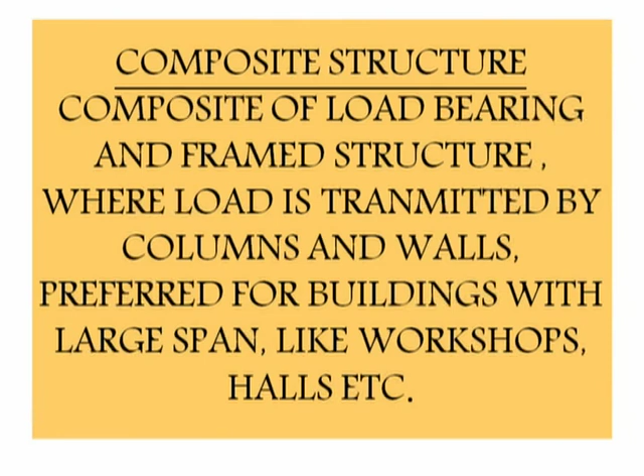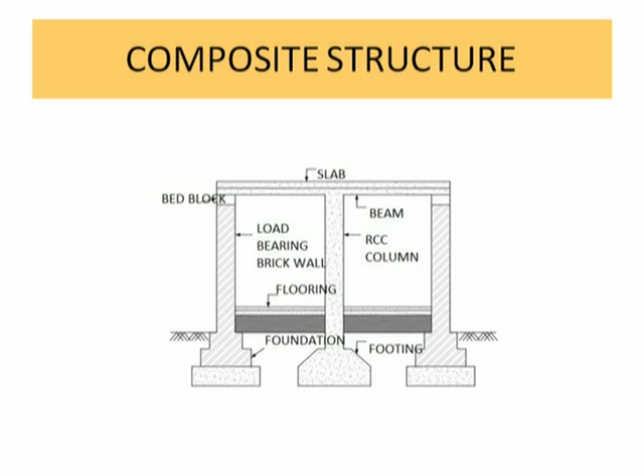This picture you are seeing is an example of a composite structure. Here you can see the different components like the slab and the beam, an RCC column, as well as a load-bearing brick wall. The flooring is also mentioned here, and at the bottom you can see the foundation. The load of this structure is transmitted to the foundation by the walls as well as the column. So the vertical elements present in the structure, that is the wall and the column, are responsible for the transmission of the load.

Now we will discuss the comparison between the load-bearing and the frame structure. Earlier we saw two categories of the type of structure: one is load-bearing and the other is the frame structure. Let us see the difference between these two. In the load-bearing structure, the components are slabs, beams, and walls. In the frame structure, the components are slabs, beams, and columns. In load-bearing there is a wall; in the frame structure there is a column. The load is transmitted through the walls in the load-bearing structure, while in the frame structure the load is transmitted through the columns. That is the basic difference.

Since the wall is responsible for the transmission of the load, load-bearing structures are limited up to three stories. The normal practice is that load-bearing structures are constructed up to three stories. In the case of the frame structure, you can construct a multi-storied building. So multi-storied buildings are constructed using the frame structure method of construction.

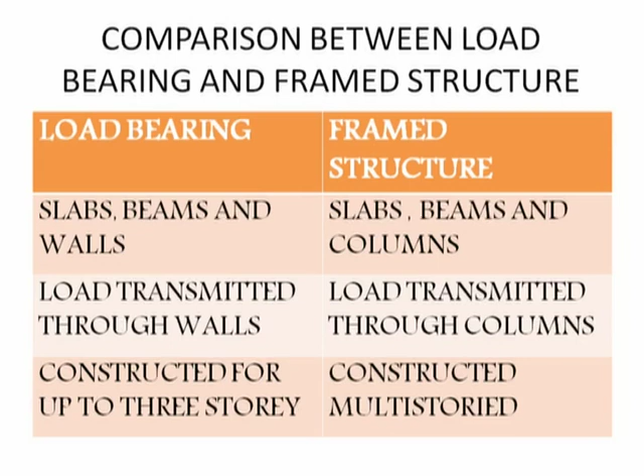In the load-bearing structure, the thickness of the walls reduces from the ground floor to the higher floors. The highest thickness will be in the ground floor walls. As you go to the upper floors, the thickness of the wall is reduced. In the case of the frame structure, the thickness remains the same.

Walls are mere partition walls. In the frame structure, walls are there, but the function of these walls is not to take the load, but just to create a partition among the different rooms. So in the case of the frame structure, the wall thickness remains the same. It is not changing. It is the same for all floors, and the walls have a purpose only for partition.

As you know, the thickness of the wall is reduced from the bottom to the top, so the carpet area of the lower floor will be less. The carpet area of the lower floor will be less, and if you go upstairs, the carpet area will be a bit higher in the higher floors. In the case of the frame structure, the carpet area remains the same.

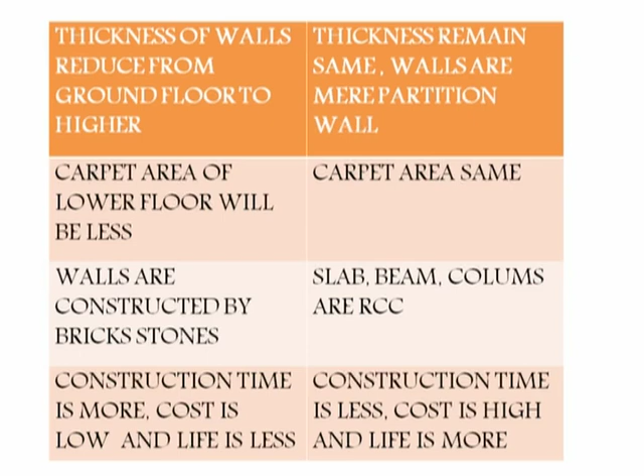In the case of the load-bearing structure, the construction time is more, the cost is low and the life is less. In the case of the frame structure, the construction time is less, the cost is high and the life is more. Life is more in the frame structure compared to the load-bearing structure.

So this is the discussion we have carried out relating to buildings classified according to the type of construction, and the difference we have made between the load-bearing structure and the frame structure. Now come to the next topic.

The next point of discussion is the types of loads acting on buildings. Buildings are susceptible to loads of different types. Let us see the different types of loads acting on buildings. The first load is known as the dead load. The second type is the live load. Next is the wind load. Then the snow load. Then the load due to rain. And last is the earthquake load.

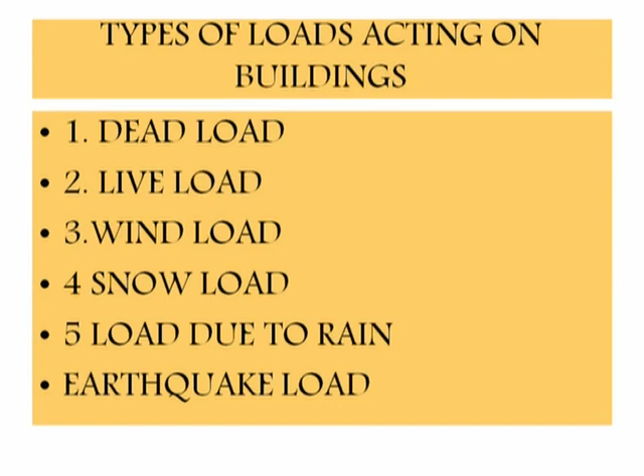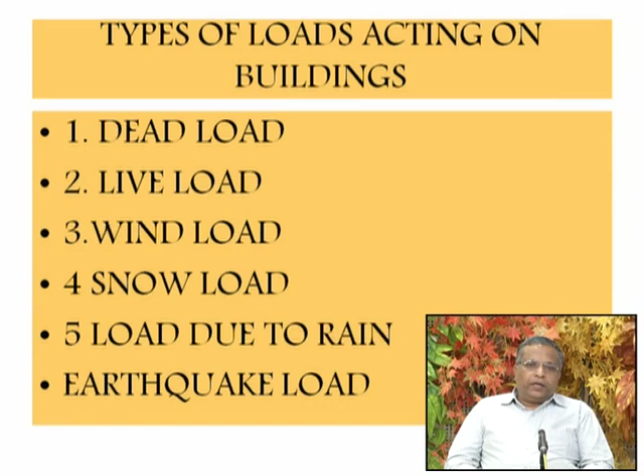These are the different loads or forces acting on a building. The building is to be designed in such a way that it resists these different loads. Let us see how these loads act on the building differently. First is the dead load. What is a dead load?

Say, for example, a building is constructed. A building has its own weight. If nobody is in the building and it is empty, the building still has its own weight, the weight of its own components: the load of the RCC slab, the load of the walls, the load of the doors and windows. So this type of load is known as a dead load.

This dead load is a permanent, immovable, untransferable load. It is a load of the building components; in other words, it is the load of the building itself. So this load is the load of the different materials of which the building is constructed. Normally the dead load is the load of the different materials.

To work out the load acting on the building, you must know the quantum of material in the building, and this will be based on the dimensions of the different components of the building constructed with the different materials. Those dimensions you must know. Then you must know the volume of that particular material, and on that basis you can work out the load acting on the building.

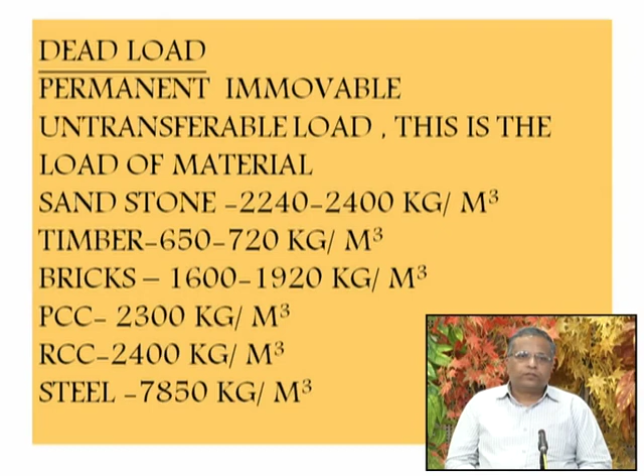The bricks have a weight of 1600 to 1920 kilograms per meter cube. Then is the PCC, that is the plain cement concrete, that is 2300 kilograms per meter cube. Then is the RCC, that is 2400 kilograms per meter cube. Then is the steel, that is 7850 kilograms per meter cube. So depending on the type of the material, different unit weights will be there.

Steel is the most common type of material, and it has a weight of 7850 kilograms per meter cube. RCC is also a very important material, and it has a weight of 2400 kilograms per meter cube. Some other materials: cement is 1440 kilograms per meter cube. Sand is 1760 to 2000 kilograms per meter cube.

Water has a unit weight of 1000 kilograms per meter cube. It will be useful for designing the water tank. Clay will have a weight of 1760 kilograms per meter cube. Limestone has a weight of 2400 to 2640 kilograms per meter cube. These are the different unit weights of the different materials, on the basis of which you can work out the dead load of the building.

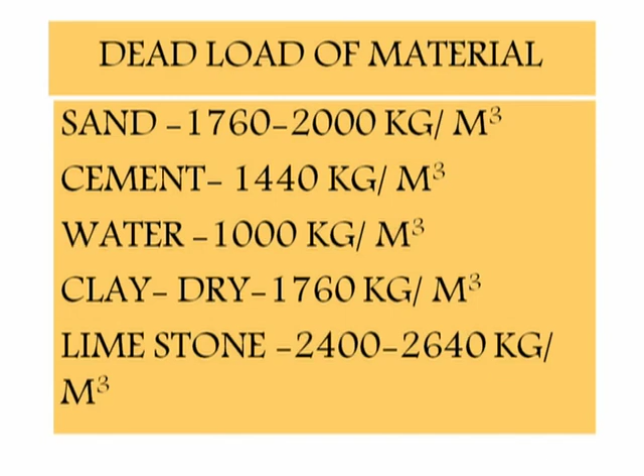Then the second category of load is the live load. Whatever moving or transferable load is acting on the building, say for example the number of persons visiting a building. You may bring some material, some movable furniture, some other house appliances. These are all movable, transferable and temporary. Persons gathered in a house may disperse. So this load is known as a live load. This is a movable, transferable, temporary load.

It is also known as superimposed load. This load acts on a building on a temporary basis. It may be more, it may be less, depending on whatever things you gather in a building temporarily. This load is to be calculated according to the normal criteria in the Indian standard. For example, in the design of a building, the following types of live loads are to be taken. First is the dwelling house, considered as 200 kilograms per meter square.

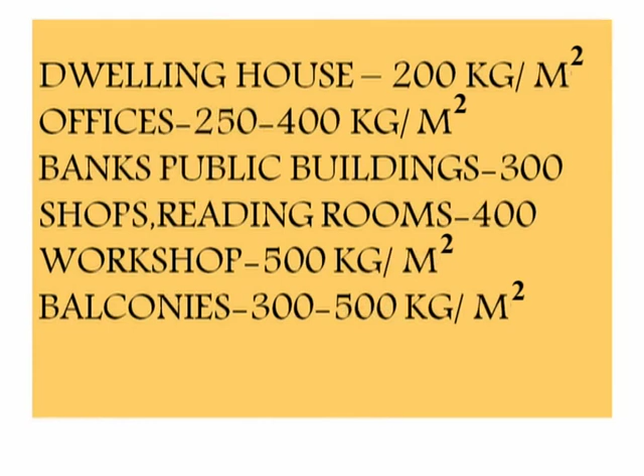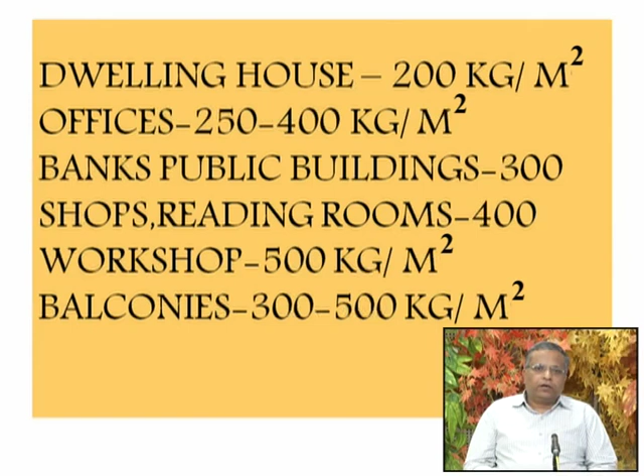Then offices, 250 to 400 kg per meter square. Banks or public buildings, 300 kilograms per meter square. Shops and reading rooms, 400 kg per meter square. Workshops, 500 kg per meter square. Balconies, 300 to 500 kg per meter square. Floors of warehouses of medium height, 750 kg per meter square. And floors of warehouses, factories and heavyweight, 1000 kg per meter square. These are the criteria to be provided for the live load.

Now in the case of a multi-storied structure, when the number of floors is more, say 10 floors or 7 floors, we know that all the floors will not carry the superimposed load at a time, because in normal practice the load does not act on all the floors simultaneously. For that purpose, a percentage reduction in the load is suggested, because in practice all the floors will not be loaded at a time, so for the sake of economy the loads are reduced.

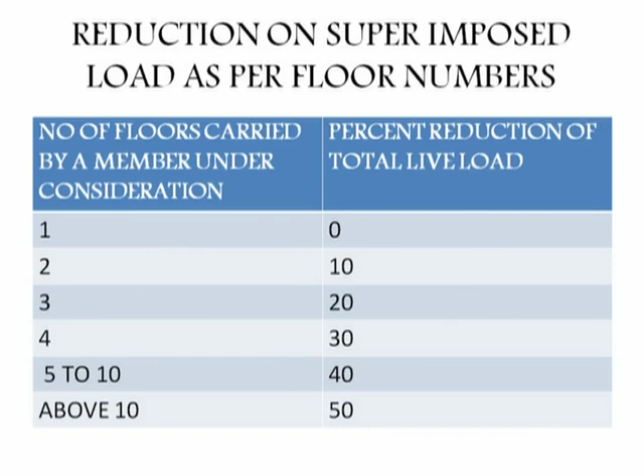Depending on the number of floors, the percentage reduction is suggested by the Indian standard. For one floor, there is 0% reduction, meaning no reduction. For two floors, a reduction of 10%. For three floors, a reduction of 20%. For 4 floors, a reduction of 30%. For 5 to 10 floors, a reduction of 40%. And above 10 floors, a reduction of 50%. So depending on the number of floors, the percentage reduction is made.

The next category of the load is the wind load. The wind load normally acts on a multi-story building. The windward face of the building will have the force of the wind acting on it. If the height is more, the wind load will be a significant one, and therefore it is required to be considered in the design of a building. In the case of tall buildings, the effect of the wind load is considered.

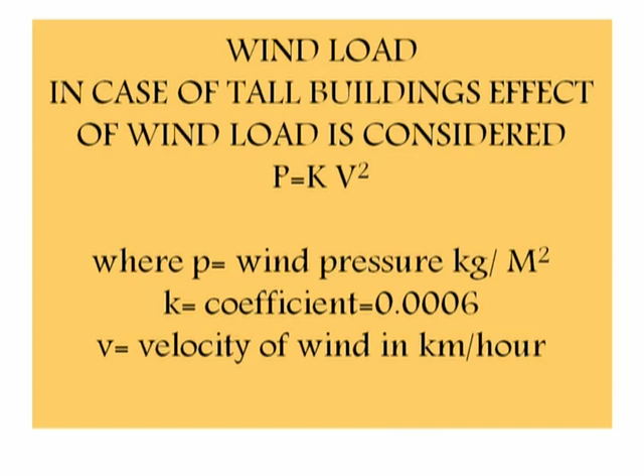The formula for finding the forces acting on the building due to wind load is mentioned here. It is P = K × V², where P is the wind pressure, measured in kilograms per meter square. K is the coefficient, which is normally taken with the value 0.0006. And V is the velocity of the wind in kilometers per hour. This way the wind load is considered on a structure.

In mountainous and northern India, there is another type of load which is also considered, known as the snow load. Snow will have an effect of load. When there is snowfall, the buildings are susceptible to the snow load, and it is considered as 2.5 kilograms per meter square of the area.

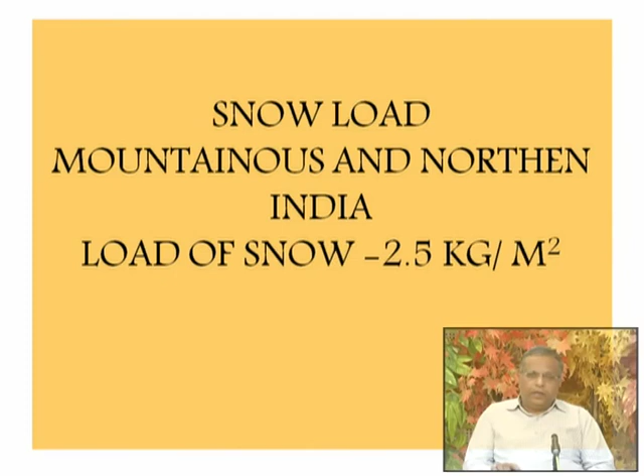The next load is very important in the design and construction of the building: earthquake loads. Earthquake is a very prominent phenomenon, and the building should be designed as an earthquake resistant building. Many measures are required to be taken so that the building is earthquake resistant. Proper reinforcement, proper consideration of the forces, and proper design of the foundation are very essential so that the building will be earthquake resistant.

Depending on the height and the width, the building is to be planned in such a way that it has the features of an earthquake resistant building. You may provide reinforcement in the corners of the walls and many other measures. You should not design a slender building. That is a necessity in the design of an earthquake resistant building.

Due to earthquakes, horizontal and vertical vibrations are created, and therefore the necessary earthquake factors are considered. To take these vibrations into consideration, it is necessary that the earthquake factors are considered. India is divided into 5 earthquake zones to consider the forces according to the risk of earthquake.

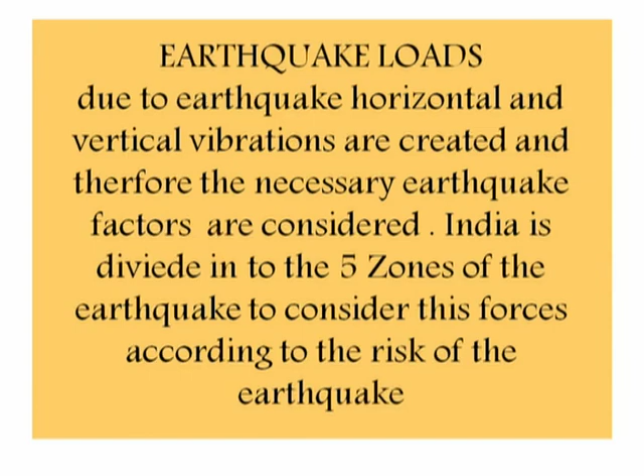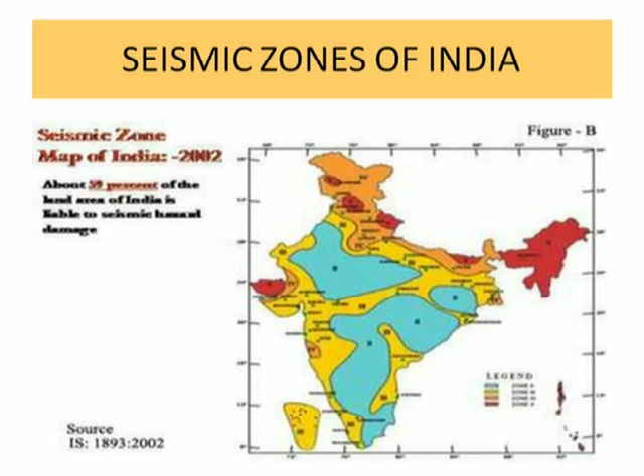According to the different accelerations of the earthquake waves, the necessary factors are considered for the design of a building. For different types of construction, it is very essential to consider the earthquake forces, and the structure should be designed in such a way that it is earthquake resistant. These are the different loads that we have discussed so far.

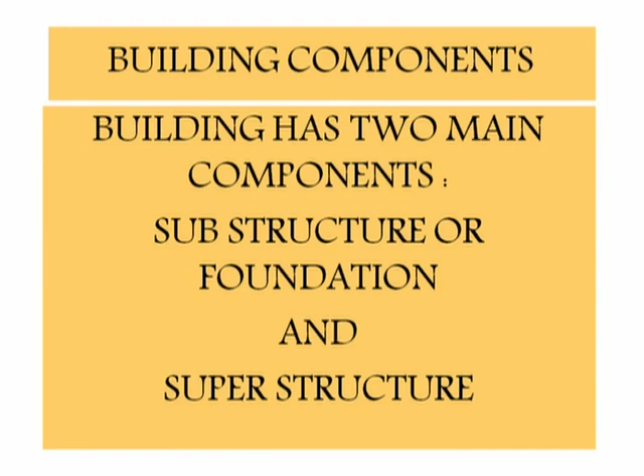After discussing the different types of loads acting on the building, we will now start our discussion on the building components. First of all, a building has 2 main components, or you can say 2 main parts. The first one is the substructure or the foundation, and the second part is the superstructure.

Let us see what a substructure or foundation is. The substructure or foundation is the lower portion of the building, usually constructed below the ground level.

So the building is divided into two parts: one is below the ground, one is above the ground. Substructure is the lowermost portion of the building. It is usually constructed below the ground level. The substructure is a part of the building below ground level.

Now, this part of the building below the ground level transmits the load of the superstructure below the ground level. The function of this part is the transmission of the load of the superstructure to the ground. That component, that part, is known as the substructure or the foundation.

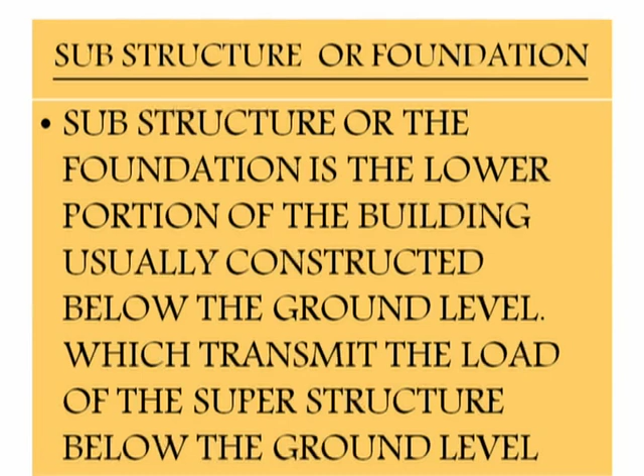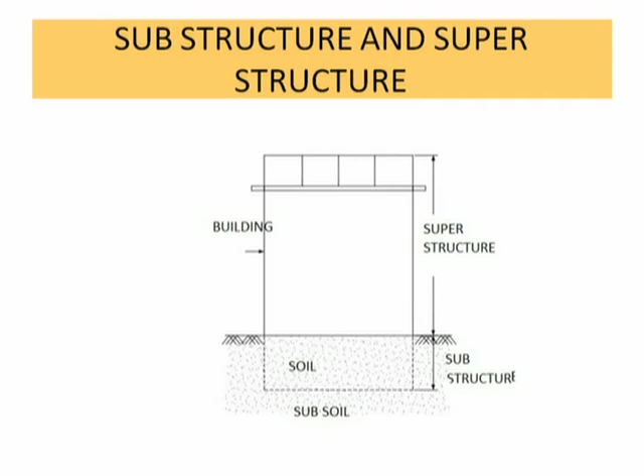Here is a picture which shows the clear distinction between the substructure and the superstructure. Here you see the part which is below the ground is known as the substructure, and the part which is above the ground is the superstructure.

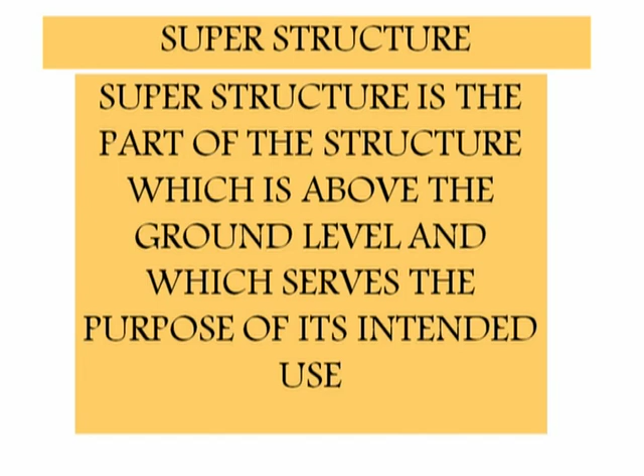Superstructure is the part of the structure which is above the ground level and which serves the purpose of its intended use. Now, the part of the structure which is above the ground is known as the superstructure. It may be a room, it may be a kitchen, or whatever the purpose for which it is intended. That part is serving that purpose, and that is known as the superstructure. All the parts of the building that we see above the ground level are known as superstructure.

Now, the superstructure has many different components. Here we have divided the building into two major parts. One is the substructure, another is the superstructure. Substructure is the foundation, and all the other components are part of the superstructure.

Superstructure's parts are: the plinth, the walls, columns and beams, the ground floor and the upper floors, the sills, the lintels and weather sheds, the doors, windows and ventilators, the roofs and slabs, the parapet, the stairs, lifts, ramps, and the building finishes, which include the plaster and the whitewashing. So all these parts are known as superstructure.

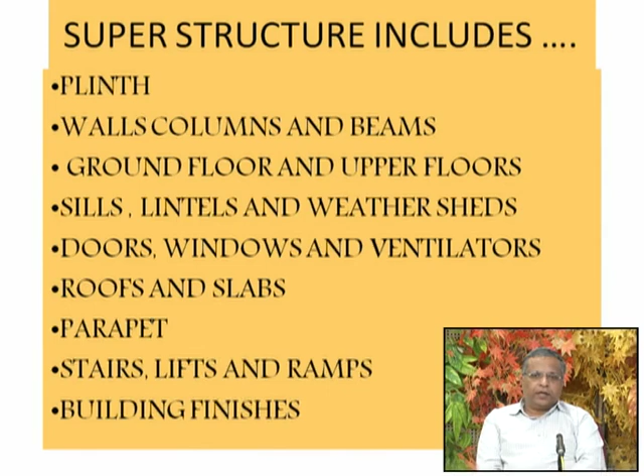Let us repeat this once again. Plinth means the part of the building below the floor and above the ground. Walls, columns, beams, floors, lintels, sills, weather sheds, doors, windows, ventilators, roofs, slabs, parapet, stairs, lifts and ramps, building finishes. These all are the superstructure.

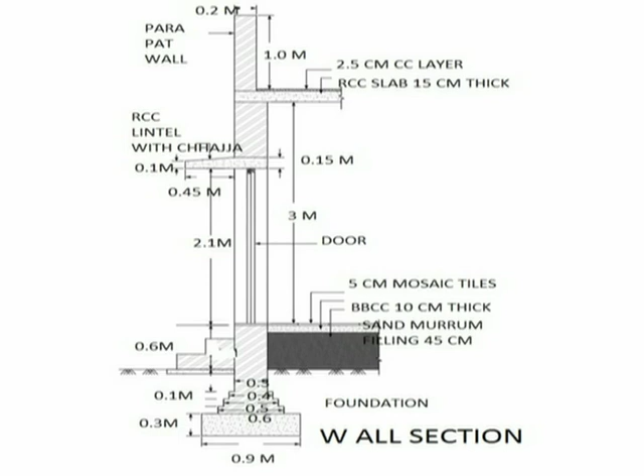These are the different components. Here the substructure is mentioned, the superstructure is mentioned. All these different components are mentioned in this section. The study of this section of the wall is very important because there you will be able to understand all the normal dimensions of the building.

Now let us see the foundation. Now let us see the different components of the building. Out of all the components of the building, foundations are very important because foundation is a structure which transmits the load from superstructure to subsoil. The basic function of foundation is to transmit the dead loads, live loads, and other loads to the subsoil on which it rests.

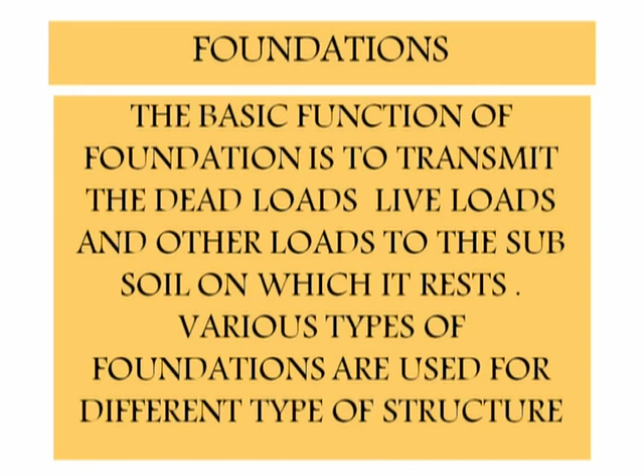Various types of foundations are used for different types of structures. Now you see, the basic function of the foundation is to transmit the dead loads, live loads, and other loads to the subsoil on which it is resting. Various types of foundations are used for different types of structures. Let us see those various foundations.

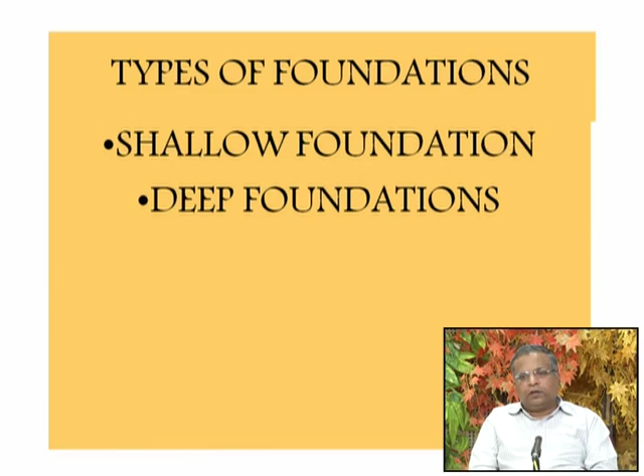Foundations are broadly divided into two categories. One category is the shallow foundation and another is deep foundations. Depending on the depth of the foundation, the foundations are categorized as it may be a shallow foundation or it may be a deep foundation. First of all, let us see what is a shallow foundation. Shallow foundations, depending on the depth.

If the depth of the foundation is equal to or less than its width, it is called shallow foundation. Say for example, if the depth of the foundation is less than its width, then it is known as shallow foundation. Shallow foundation should be taken to a minimum depth of 800 millimeter. So when the depth is less than its width, then it is known as a shallow foundation. The normal depth of the foundation is near 800 millimeter. It may be extended up to 1000 millimeter also. So normally up to 1 meter you can have the shallow foundation.

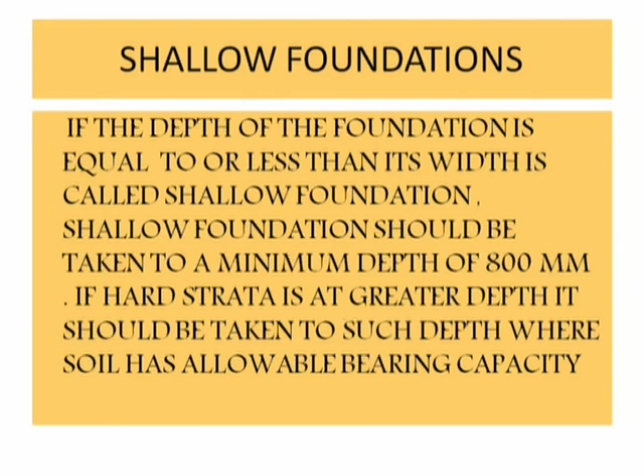Now, where to provide the shallow foundation? In which situation is it preferable to provide a shallow foundation? If the hard strata is at a greater depth, it should be taken to such depth where soil has allowable bearing capacity. Now, in case you don't find the hard strata in the range of 800 to 1000 millimeter, you should go deep because the hard strata is required and the safe bearing capacity is also required for the safety of the foundation. Therefore, this depth may be extended wherever required, and where there is no availability of hard strata within that much depth, you have to go for more depth. Shallow foundations are applied where the hard strata is available at relatively lower depths.

Another type of foundation is known as deep foundations. Several types of foundations are required for the different types of structures. Normally, the open footing and spread footing are the common types of foundations for buildings. In case of deep foundation, pile foundation, caisson and cofferdams, these different foundation structures are required; well foundation is also one of the foundations for bridges. When the depth of the foundation is equal to or greater than its width, it is called deep foundation. In this situation, the depth of the foundation is more than its width. If the depth is much, then it becomes a deep foundation.

One of the common examples of deep foundation is a pile foundation. Pile foundation is the example of deep foundation where loads are taken to low level by means of vertical members. Piles are vertical members that may be of reinforced cement concrete, or of wood or steel material. These types of piles are constructed. They are vertical members and they transmit the load of the structure to a great depth of the soil strata. When the hard strata is not available at shallow depth and is at a very big depth, in this situation, deep foundation is the option available.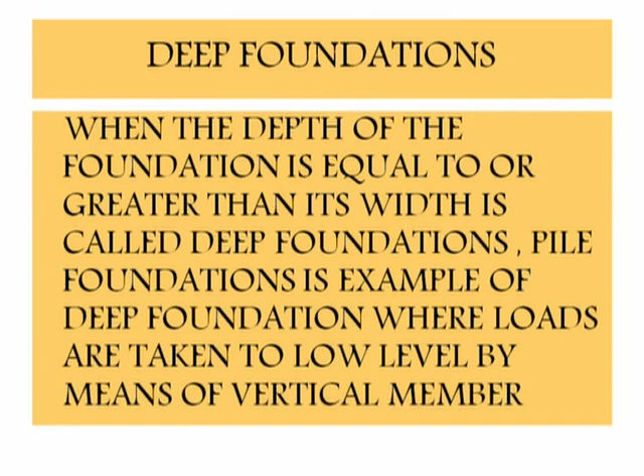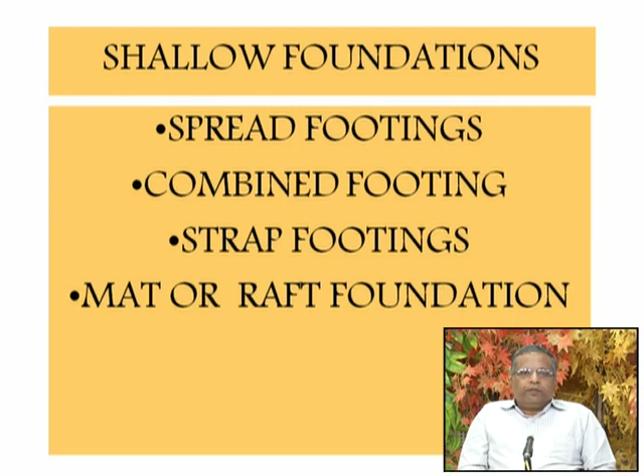Let us see the different types of the shallow foundations. Which are the different foundations? Different types of the shallow foundations are: one is the spread footings. Spread footing, as the name suggests, the load of the wall is being spread by expanding the base width. That is known as a spread footing. In the section which we have seen just earlier of the wall section, the foundation that was mentioned there was an example of a spread footing.

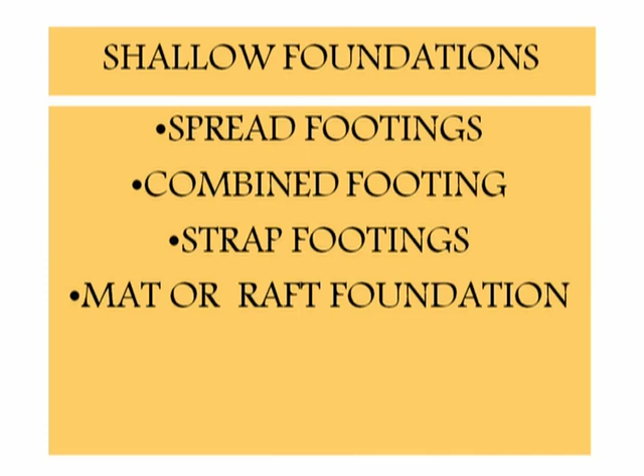Another is the combined footing. Combined footing means a common footing is to be provided for the different columns. Then another type of the shallow foundation is strap footings. Strap beams are provided, and this type of footings are known as strap footings. Another type of foundation is a mat or raft foundation. Sometimes in the entire foundation area at the bottom a common slab is constructed which is known as a raft. This type of foundation is known as a mat or raft foundation.

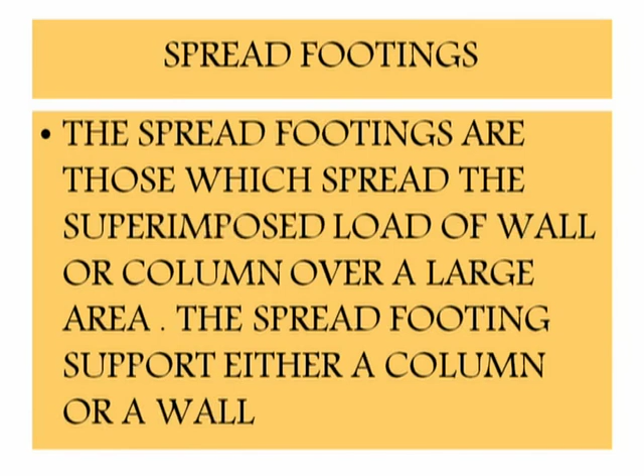First is the spread footings. The spread footings are those which spread the superimposed load of the wall or column over a large area. As the name suggests, the basic function of this foundation is to transmit the load of the wall over a larger area. That's why it is known as the spread footing. The spread footing is supporting either a column or a wall.

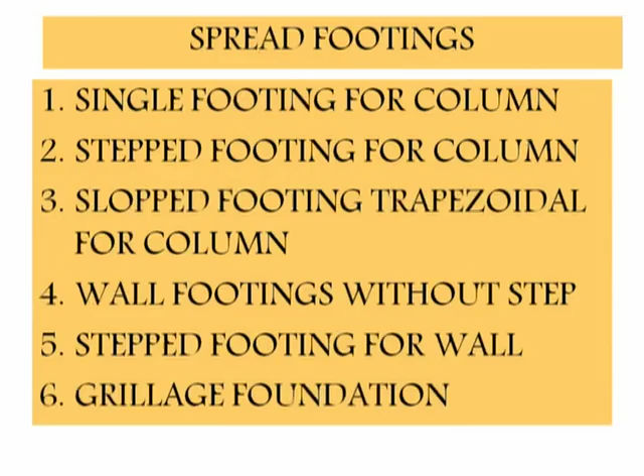Let us see the different types of the spread footings. One is a single footing for the column. Second is the stepped footing for the columns. Third is the sloped or trapezoidal footing for the column. Fourth is the wall footing without the step. Next is the stepped footing for the wall. And next is the grillage foundation. Grillage foundations are common in the industrial sector. These are some basic types of the spread footings. These footings we will discuss.

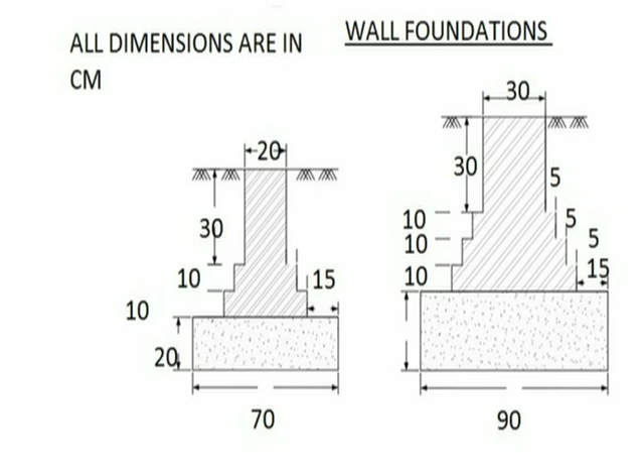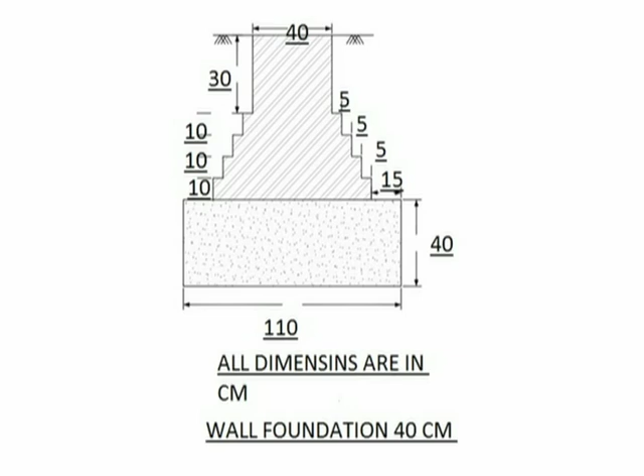This is an example of a foundation for a wall thickness of 40 centimeter. Here all the dimensions are in centimeters. The width of the foundation concrete is 110 centimeter. The thickness is 40 centimeter for the base concrete. This is similar to what we have just seen of the foundations of the 20 and 30 centimeter wall thickness. Here you see that the load is being transferred from the wall into the different steps, from 40 centimeter to 50, 50 to 60, 60 to 70, and then it is transferred gradually to the base concrete, and the base concrete will transfer the load to the subsoil.

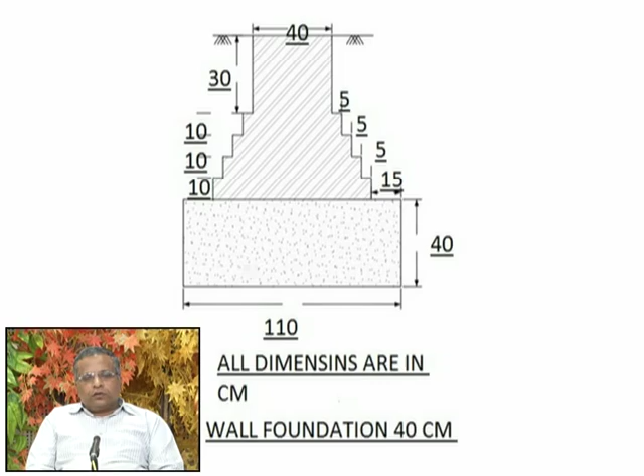So today we have discussed the different types of buildings according to the methods of construction. We have seen the composite structure. We have seen the difference between the load bearing and the frame structure. We have seen the different types of loads which are acting on the building. Then we have also seen the different components of the building, and we have discussed the foundations of the building.